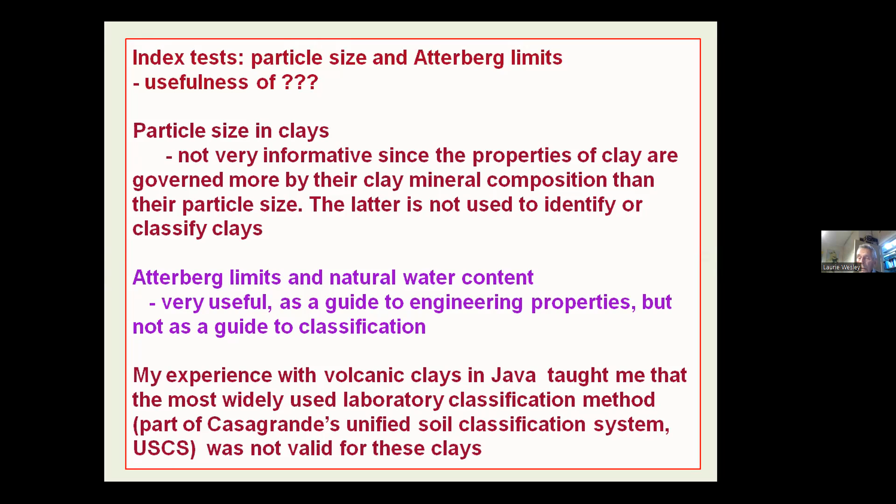But as a general rule, and I'll mention this again in a moment, you should never dry volcanic soils before you do your Atterberg limits and things like that, because it alters their properties. I just want to emphasize that Atterberg limit tests must be done properly, which means technical staff must be trained and supervised by people who really are experts in those tests.

When I was in Bandung the second time, we ran training courses for staff of laboratories that were being set up in the various provinces. Sometimes I did go to the province, and other times they came to Bandung, where I ran courses for them. And as I've said below there, me, a younger version, training engineers and technicians to do Atterberg. That would have been in Bandung somewhere. I came back in '68, so it would have been about 1970 where we were running those courses.

And it might surprise you, I've published quite a few papers with Atterberg limits, particularly the paper that Mike mentioned that I wrote not too long after I left Bandung, and there are a lot of Atterberg limits there, and in all of my other papers. None of those Atterberg limit tests were done by anyone but either myself or staff that I trained and supervised, just to make sure that they were reliable,

because some engineers are not very diligent in checking on the way their staff do these tests. And if you leave technicians to teach the test, they tend to drift away from proper procedures. So you just need to be aware, as I've emphasized there, it is necessary to do the test properly, but if they're done properly, they are very useful.

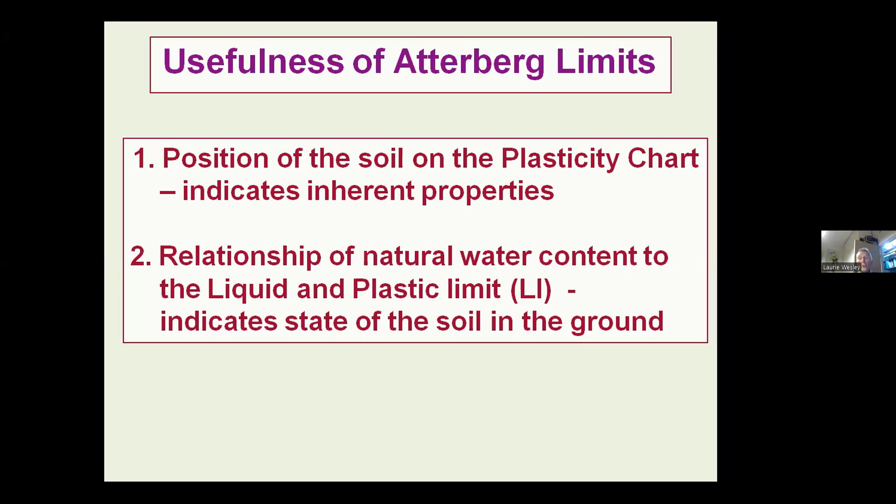And they're useful for two things. One is the position of the soil on the plasticity chart, which indicates just what the nature of the material is. What I've said here, it indicates their inherent properties. Then it's the relationship between the natural water contents to the liquid and the plastic limits. That tells you something about the state in which the soil exists in the ground. So let's have a look at that.

The plasticity chart was based on Casagrande getting hold of a whole range of various types of soils and working through them all and classifying them according to the manipulative test I've just described, and then drawing a line to separate the ones that behave like silts from those that behave like clays.

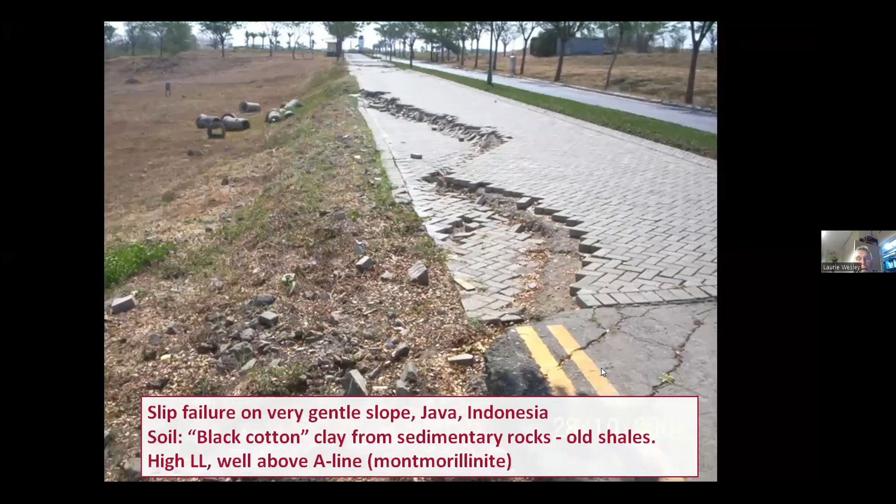Now, the second use of Atterberg limits, valuable about the state of the soil in the ground. To do this, we must also know, as I've already said, the natural water content. And I'm going to use the term compactness here, or denseness, although we don't normally use compactness or denseness for clays, but I'll just mention why. With sand, you use relative density as a measure of the denseness or compactness of the soil.

And with clay, we use this thing called the liquidity index, which is the ratio of the plastic limits to the... let's wait, and I'll bring the chart up in a moment. It's the ratio of the difference between the natural water content and the plastic limit and the liquid limit. That's what it is. It's the natural water content minus the plastic limit divided by the liquid limit minus the plastic limit.

However, with the clay, the liquidity index does not tell the full story. The liquidity index will actually only tell you what the remolded strength is if you remold it into a softened state. So we also need to know what the in situ undrained strength is to really evaluate the soil.

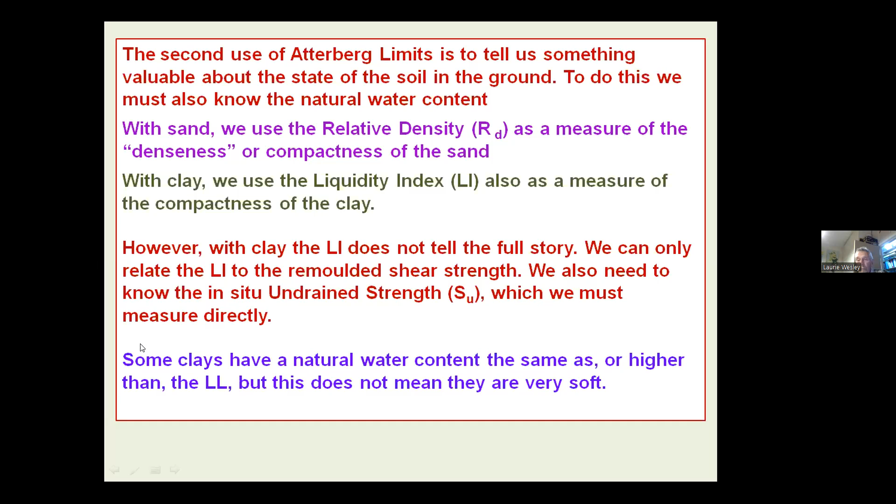Some clays have a natural water content well above the liquid limit, but that does not mean at all that they are soft. In fact, if they had a water content higher than the liquid limit and you thought that they were okay, once they were remolded, they'd flow away. In other words, if they had a water content higher than the liquid limit, they'd be flowing away. But there are plenty of soils with the natural water content above the liquid limit, quite firm in situ. This is just to emphasize that point.

There's plenty of literature to indicate that the undrained shear strength at the plastic limit is somewhere around 200. A recent paper said it should be about 170. And the difference between the undrained strength at the plastic limit and the liquid limit is a factor of 100. So if the undrained strength up here is 200, your undrained strength is 2 kPa and a little bit left.

So if your soil has got a liquidity index up here somewhere, it will be sufficiently liquid that it would just flow away. But as I said, there are quite a lot of soils that have got a liquidity index above 1, or natural water content above the liquid limit.

And tropical red clays, they generally have a natural water content fairly close to the plastic limit, so they would drop down here. This is some data we've got from weathered sandstone in Auckland. They're around about here. But the volcanic ash clays, they're mostly around here, but you can find the volcanic clays with a natural water content fairly well above the liquid limit.

Some of you may be aware of what they have in Norway, the quick clays of Norway, where they've got natural water contents well above the liquid limit. And they had a very famous slide there, I've forgotten the name of it. Mike probably knows it because there's a famous movie. This was way back in the 1960s, I think. They had a camera of it, how these big chunks of farmland were sliding down into the lake because they consisted of quick clays with water contents well above their liquid limit.

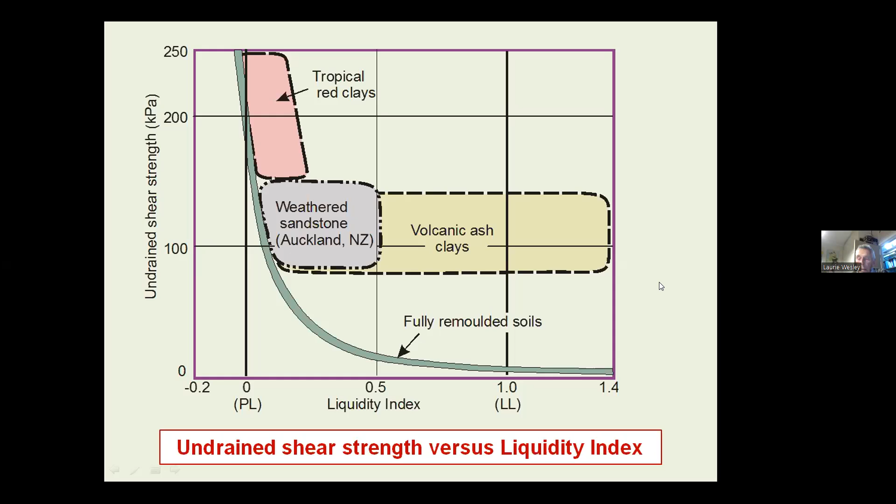That's a bit off what I'm trying to talk about. Let's move on to the next one.

We use a different index here to indicate the state of compactness of the clay, which, as I said before, is the natural water content subtracting the plastic limit over the difference between the two. So it's this amount here over that amount there. So it's telling you that if your natural water content is somewhere down here, it will not be a sensitive material. It will have a strength fairly close to the plastic limit strength. So it's not going to be a difficult material to work with if you want to do earthworks.

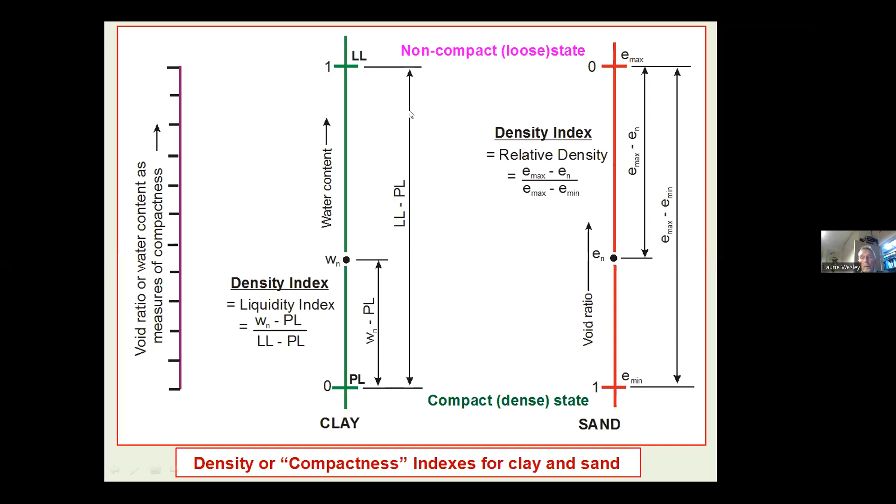In fact, the optimum water content from a standard Proctor compaction test for most clays is fairly close to the plastic limit. And so doing earthworks, you hardly need to do Proctor tests because the natural water content is so close to the ideal water content for compaction. But if you've got a natural water content way up at the liquid limit, you may well know from visual observation of the site that it's a perfectly safe material in situ. But if you want to do earthworks, it will be highly sensitive, and you'll have a lot of problems with your earthworks with clays with natural water contents higher than the liquid limit.

Moving on from this, clay with a low liquidity index is likely to be a strong material without a yield pressure. It will not be a difficult material to excavate and compact, and vice versa. Clays with a liquidity index near the liquid limit may be quite firm in the natural state, but may become very soft when disturbed or remolded. I won't spend time on the situation with the sand, but it's similar.

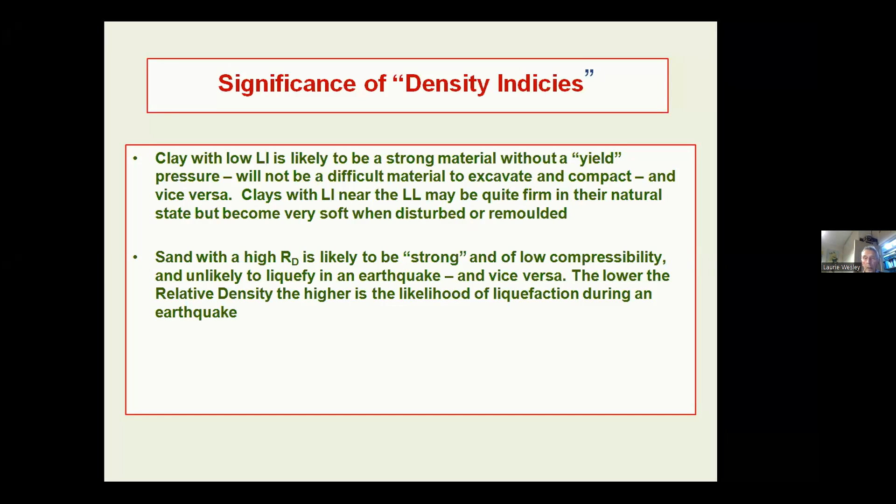Now, talking about these three types of materials in a general sense, the old sedimentary clays are generally of high plasticity and poor engineering properties. They're likely to be prone to swelling and shrinkage, and of low effective stress strength, so the C and the phi are likely to be low. Some of you may be aware of slips that occurred on the new toll road between Jakarta and Bandung as you head inland up towards Bandung. There were slips there. They were of volcanic materials sliding on top of the old sedimentary materials, and that's common with some of the very large landslides that you have in Java.

It's often the case that your volcanic material is not very deep, it's relatively shallow, and the boundary between that and the old shales is the weak point. The water is likely to be held up once it seeps down towards the old clays and build up the pore pressures above it, particularly during heavy rain. So the most difficult landslides in Java that I know of are generally of volcanic materials slipping on top of the old marine clays.

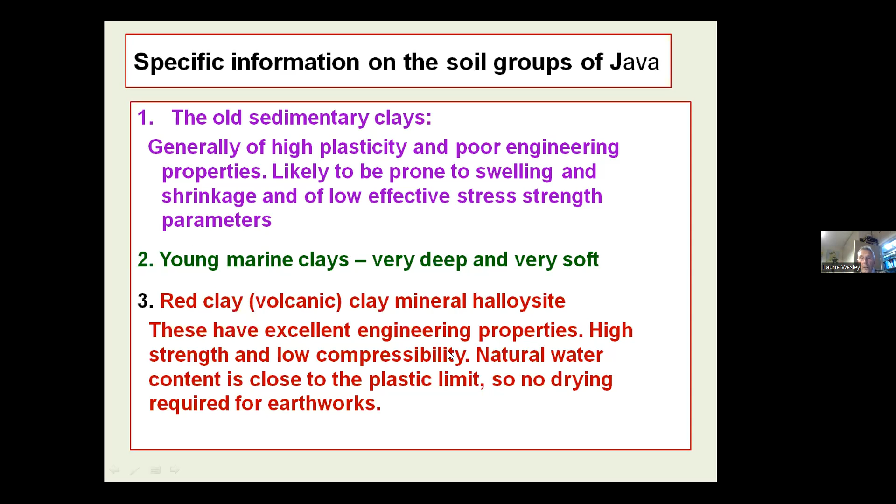The young marine clays I won't deal with. They're very deep, they're very soft, and they're not unique in any way from the young marine clays you've got in Malaysia or Thailand. Now the red volcanic clays, these are the halloysite ones. These I've mentioned have excellent engineering properties. For geotechnical engineers, they're like ideal materials. They've got high strength, low compressibility. They don't shrink and swell. Their natural water content is close to the plastic limit, so very little or no drying is required for earthworks.

That's a picture of Jakarta, where they're building a reinforced earth wall, and they're working in the red clays that you have around Java.

Thanks for that, Mike. I looked after it well.

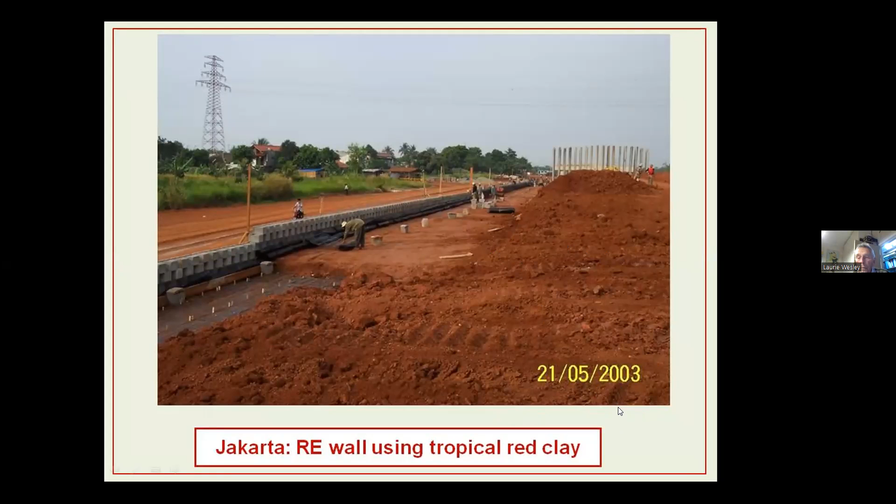The volcanic ash clays, these are unique, and their properties are they've got very high water contents and very high Atterberg limits. They've got water contents up to 150 or 200%, and they've got liquid limits up to nearly 200. When dried at room temperature or even in the oven, their properties change, and the change is irreversible. They lose their plasticity and they become like really fine sands or silt, and the change is irreversible.

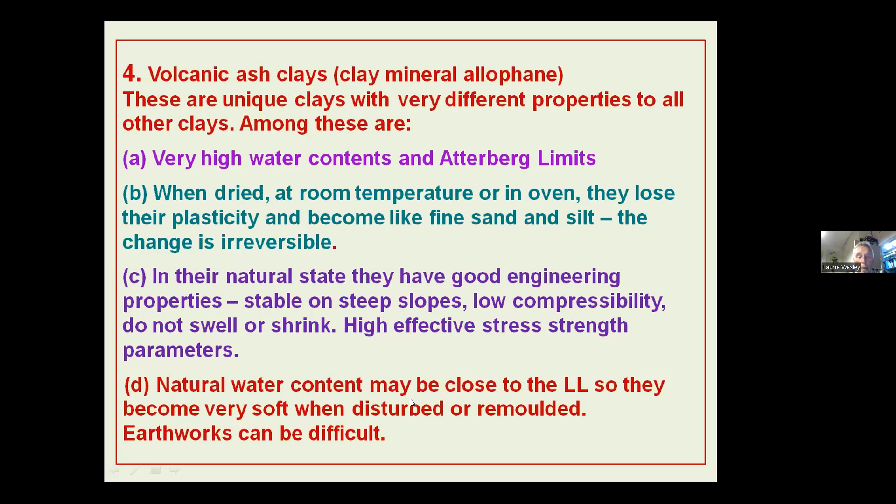In their natural state, they've got good engineering properties. They're very stable on steep slopes. They've got low compressibility and they don't swell or shrink. But their natural water content may be close to the liquid limit, so they become soft when disturbed and remolded. Earthworks can become difficult. Right, let's move on from there.

And this is an interesting dam. This is built out of this very unusual clay, although the Dutch didn't particularly realize how unusual it was when they built that dam, 1927 and 28. And the Dutch were a leading nation in soil mechanics, partly because of their involvement with building dikes and things like that. So they built this one out of volcanic ash clay with allophane and things like that, and it's performed perfectly to this day.

If you go back and look at the papers about this, you'll find that they were building another dam in a totally different location out of a sedimentary clay, and it was built to the same dimensions. Before they got the sedimentary one built to full height, they had a slip in it, and they gave up that project. But this one here got built to full height and is still in good shape today.

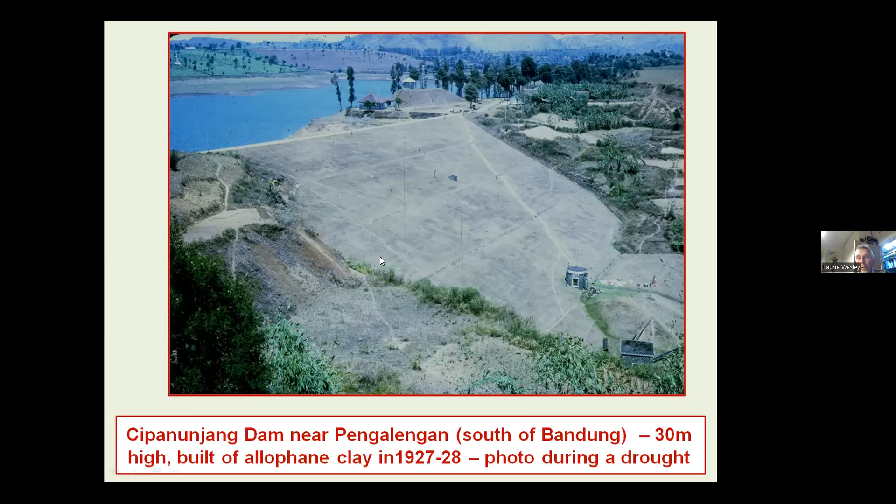Anyhow, this one I knew enough about these volcanic soils that I could recommend that they put this on a raft, and they put one on a raft. This is the second stage, and they were joining this one to the raft foundation here. There was a possibility that the load coming on here would cause some settlement. My estimate was going to be about 15 or 20 centimeters, which might have sort of caused a bit of

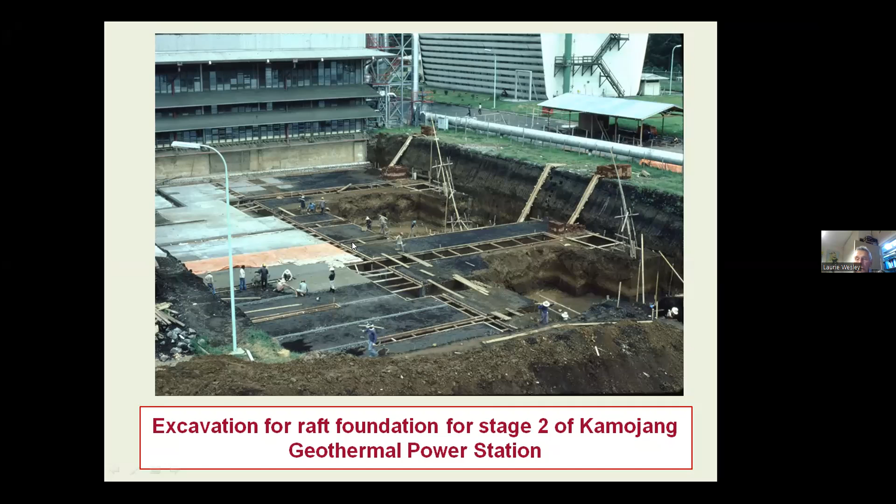distress here. But I was on the site some years later. I asked them if I could go down and have a look at the joint. They took me down and we had a very careful look. There was no trace of any distress. You couldn't see any cracks or anything going along here. So the settlement is obviously pretty small and not of any consequence.

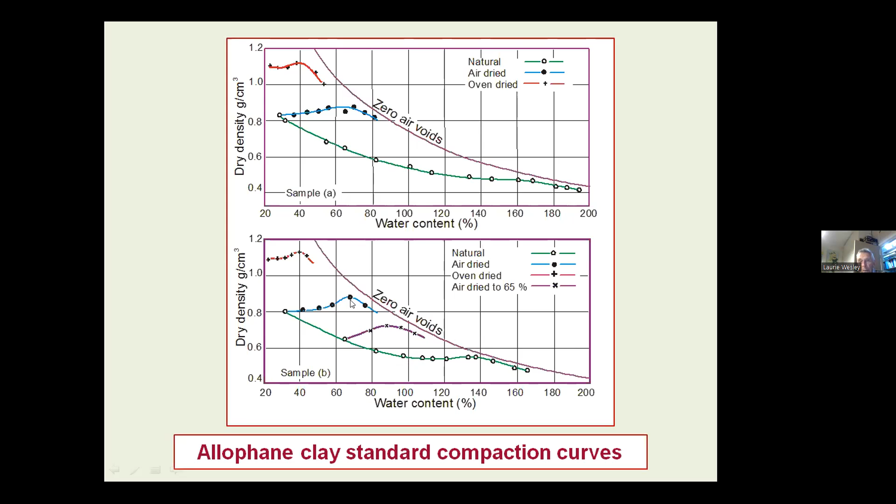So if you write your specification assuming this is your maximum, or up here, your maximum dry density and that water content, when the contractor comes to try and compact in the field, you won't be able to get to this point. You'll only be able to get to some point down there. So you just need to be aware of that.

And now, just for some general comments, the interpretation. How am I running for time? Yeah, I haven't got much longer. I think I started about 5:15. No, it's okay, Laurie, you're fine. It's good. Good. All right, am I? Yep.

The first one is oedometer test interpretation. If you are aware of textbooks or you paid attention during your lectures, you know there's a standard procedure that Casagrande dreamt up for identifying the pre-consolidation pressure. You draw a line out here, you draw a tangent out there, you draw an intercept here, and you project this back, and that intersection point there defines the pre-consolidation pressure. Now, I've got this from 3 textbooks.

If you then redraw these curves using a linear scale, you'll find there's no sign of any change in the gradient. So this interpretation here is not revealing anything about the soil property. It's just a feature of the way you've plotted the data. The log scale shows a pre-consolidation pressure, and the linear scale shows no signs of pre-consolidation pressure.

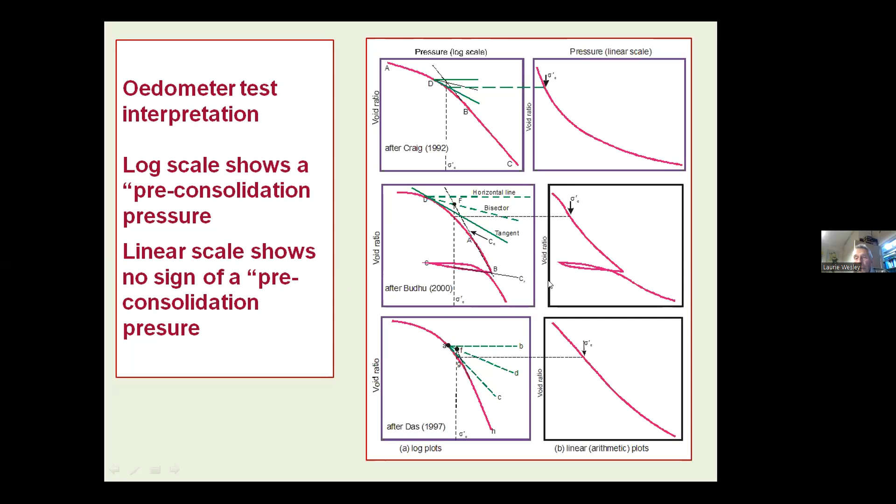And if I move on from there, I had some volcanic materials which were really quite different in their water contents, their void ratio. So I've done these 3 oedometer tests. One of the defects of the log scale is it suggests that the compressibility of all soils has got the same pattern. They come along and they curve over like that. You'll never find, if you plot it on a log scale, that you get anything other than this. So the assumption is you have a certain compressibility here and a different compressibility down here. But if you convert it to a linear scale, the picture is quite different.

Some volcanic soils and some residual soils definitely do have a change in strength or change in compressibility here. That should be called a yield pressure, not a pre-consolidation pressure. It's the point at which there's a certain structure in the soil that gives it a firmness that it holds onto up to a certain point, and then the pressure starts to collapse that structure and you get a yield going here. So this is called strain softening, really. Well, this is a linear one, and this is what they call strain hardening, because as the load comes on, the compressibility is becoming lower.

So that's a better picture, in my view, to give you an understanding of the compressibility of soils than the traditional one that you find in textbooks. The log scale rarely gives a useful picture of soil compressibility. And for settlement estimates, the linear parameter MV is much more appropriate than the log parameter CS. So you can get your linear parameter from this graph here.

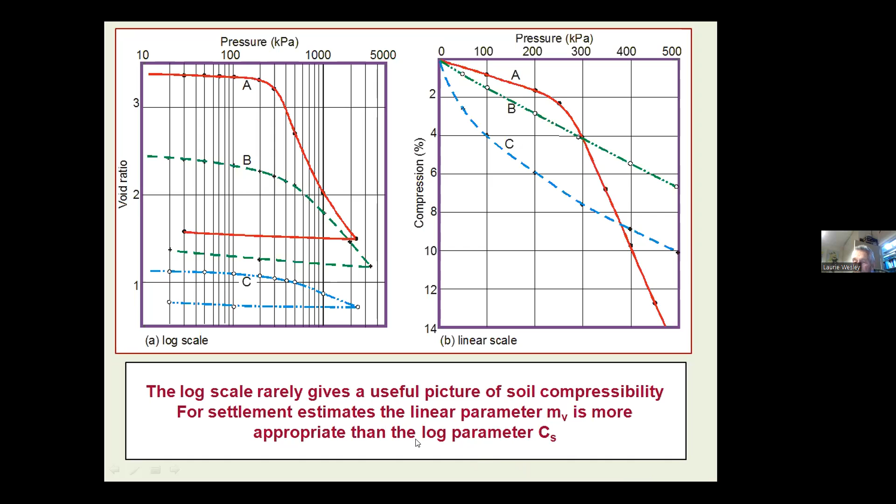Yeah, so that's what I've just said. I think that graph there is a far better portrayal to indicate the way soils behave than this one you'll find in a lot of the textbooks. The portrayal on the right gives a much more realistic portrayal for most soils.

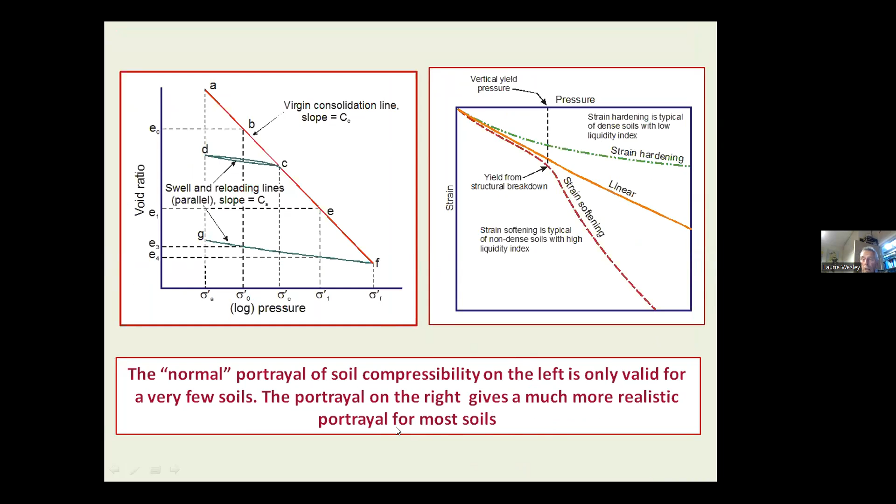And just a word about flow nets. This is not particularly important, although in some situations it is. If you determine by sticking down piezometers or things and identify a phreatic surface, the general thing that people do is they assume that this is a boundary between seepage and no seepage, and so they draw the flow net like this. That actually doesn't make much sense, because it implies that there's no rainfall on this slope here. There's only rainfall somewhere away from that.

So if you actually do it realistically, and you can do this, I mean, you can do it by hand actually, but I used SeepW to do it, and you put a uniform rainfall all along the surface here, and that will generate the flow net for you, and it will line in where the phreatic surface is.

So your phreatic surface is not a boundary below which you have seepage and above which you don't have seepage. In sands it would be different, because the water will drain out. But in clays, water doesn't drain out under gravity and leave voids behind. It simply flows down through it.

And it's not difficult to learn to draw these flow nets by hand. I sort of made myself really skilled at drawing flow nets, because I've always thought what a wonderful tool they were. But this is probably not particularly important with most slope stability work, because the assumption that there are no pore pressures above here is really a safe one.

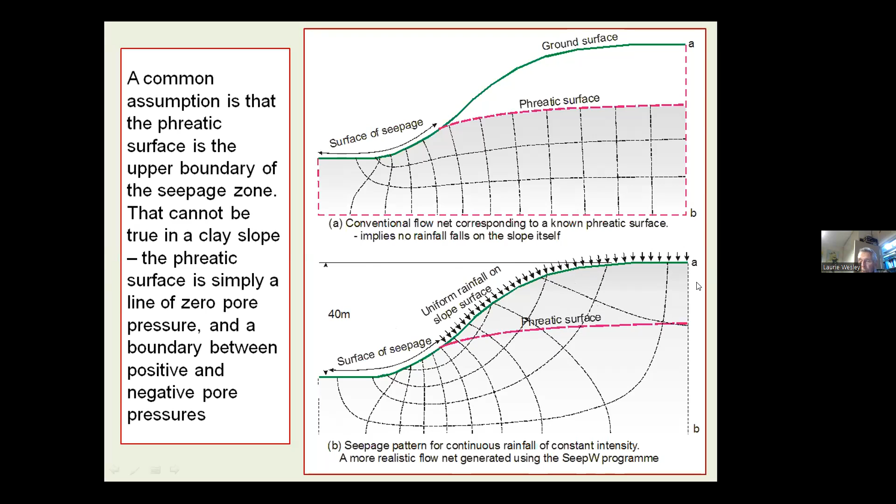And now a few notes about estimating slope stability with residual soils. I've already made the point about residual soils; these are mostly just a few pictures to indicate what you've got. I did quite a bit of work in short intervals in Malaysia once, and on a particular road they were having a lot of slips, and you can see how useless slip circle analysis or any sort of analysis would be with a soil like that.

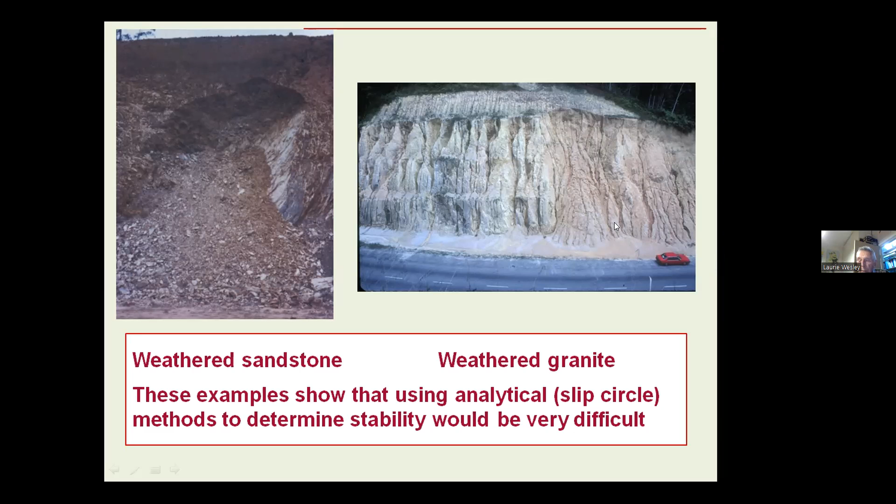Now this one's rather interesting. This is weathered granite, and we don't have weathered granites in Java, but they've got them in Malaysia. Their main feature is that they're highly erodible, although this is actually a surface slump here. But again, trying to apply slip circle analysis to this is not a particularly appropriate thing to do.

Yeah, this is, I can't move this down. I've got it, oops. Hang on, I'll come back here. Yeah, here we are.

Measuring the shear strength, C and phi, is very difficult. These are arguments about the usefulness or otherwise of analytical methods. Very few laboratories would have testing facilities large enough for the large samples needing to be tested. You'd have to have large samples of these non-uniform materials. And in addition to the strength parameters, knowledge of the seepage state in the slope would also be required if you want to do analysis of any sort.

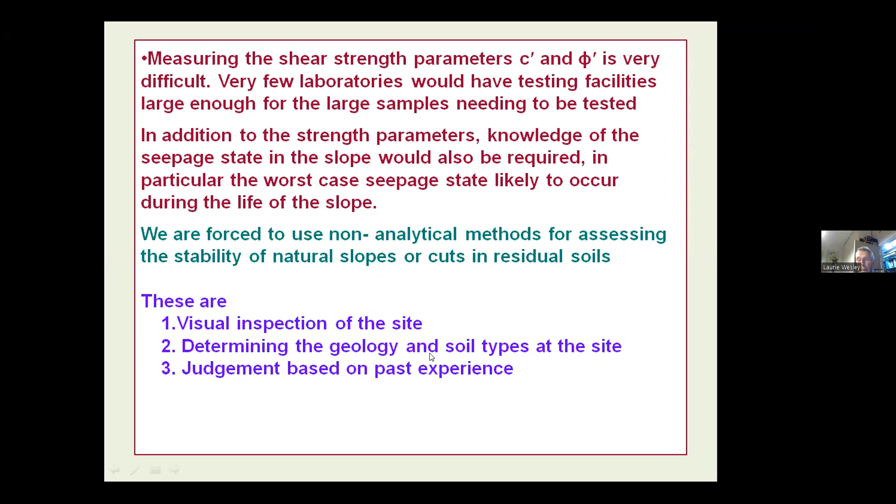In particular, the worst case seepage state likely to occur. That's what you need to know, and that's only a guess. You can make a guess at it and assume the very worst state, but it's probably likely to be extra conservative. So we're forced to use non-analytical methods for assessing the stability of natural slopes or cuts. These are visual inspection of the site, determining the geology and the soil types on the site, and then a lot of judgment based on past experience. Those are the sort of things that are important.

And this is the site that we looked at before. To build the dam, they had a borrow pit, and I think this is the slope of the borrow pit. This is the base of the borrow pit. But the back slope of the pit was perfectly stable. I'm not sure what was going on here. It looks as if they might have been stockpiling something here that slipped down. But the rear of it had side slopes about 30 meters high and an angle of 45 degrees. And I measured that up quite accurately just out of interest.

And then I was asked to advise a company wanting to possibly site a geothermal power plant, and they wanted to make a cut in, and they wanted to know how steep they could get away with for the back of the cutting. Well, I said I was pretty comfortable with 45 degrees, but I would like them to just make a couple of boreholes to satisfy themselves there was nothing unusual going on there. So just an example that if you can find a few actual slopes or cut slopes to have a good look at, they are very useful.

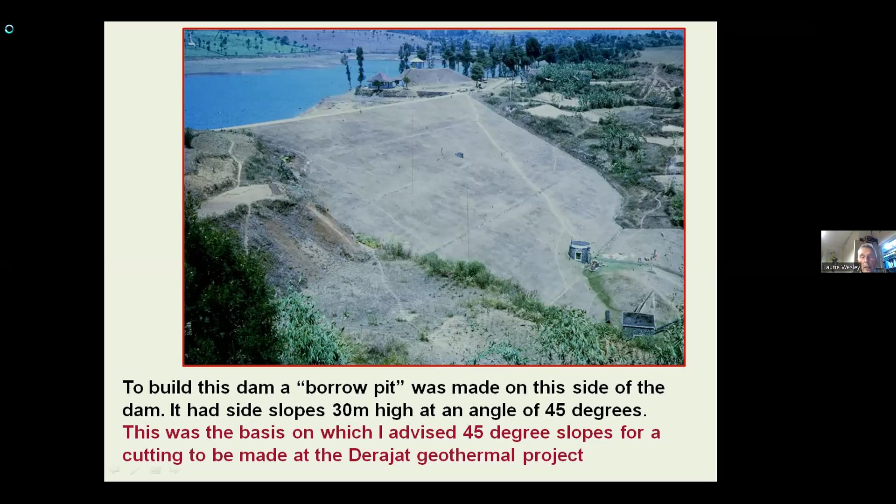If you've got a smooth surface like this, that generally means you're unlikely to have slipping. But if you've got a surface that's a bit rough like that, that's the indication that something's gone on there. Visual inspection is the starting point of assessing the stability of a natural slope.

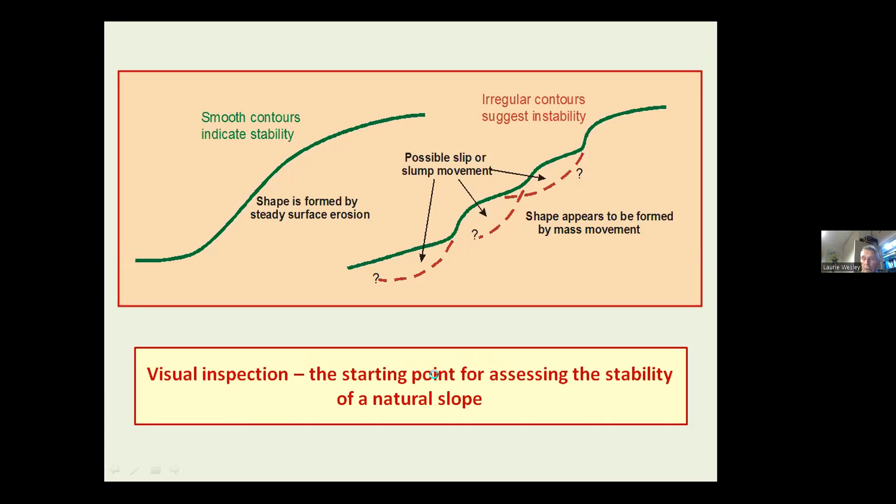This is a site near Auckland in New Zealand. It's very close to the CBD, but it's never been built on. You hardly need to be a geologist to know that this looks mighty like an old slip. This is the scarp of it up here. That's the edge of it, and it still moves a little bit. I'm just pointing out it's very valuable land, and the developers would dearly like to have it, but the geologists clearly ruled it out in the early days of the city's development, and visual inspection clearly shows signs of instability.

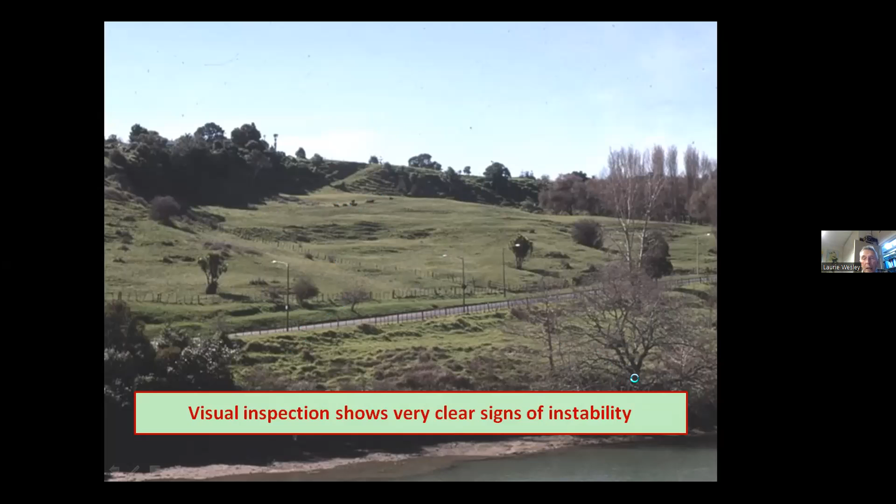And this is a slip, which is a sort of a lesson. This is a road going up to, not to Kamojang, up to the Darajat.

This was before they were starting the power station. They were just getting underway. And so they cut that cutting there, and it slipped. And I took the picture from this side. Then I went to the other side and took another picture looking back the other way.

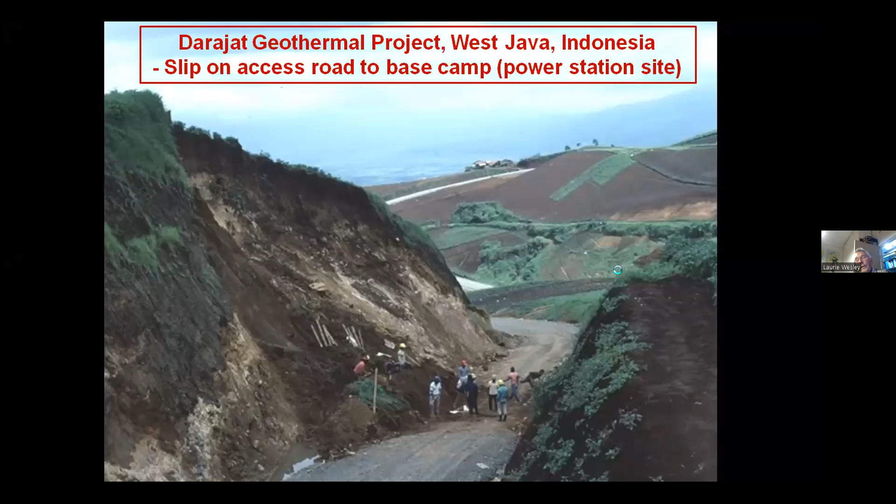And you can see here we've got nice tidy layers of allophane clay. But down below it, we've got this very different material and very mixed. But this appears to be what you would call hydrothermally altered material. You get these flows of hot water carrying various types of chemistry through it, and so that's altered that. So this is the reason they've got instability there. If this had been all the way down, then they would have no troubles.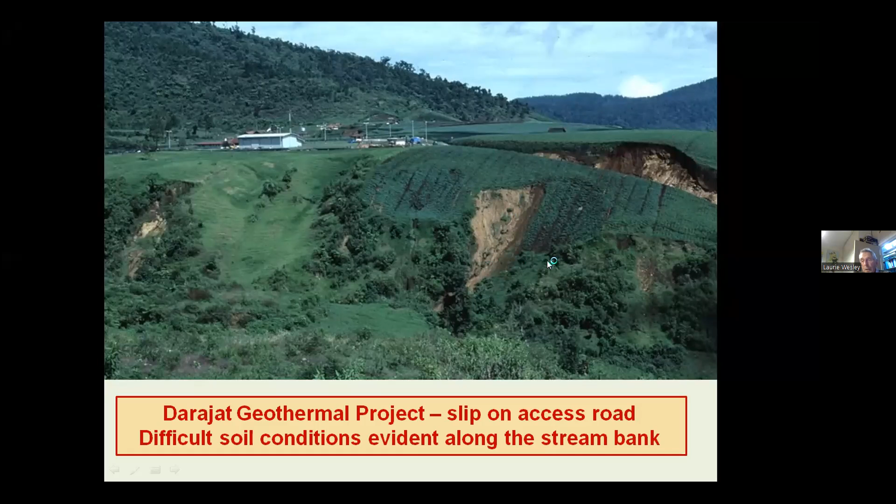So if somebody had expected this, they might have said, well, let's avoid this and take the road further along the side and follow the contours, so that they wouldn't have had to make those excavations.

So this just about draws me to the end of what I want to say, but I'll just mention something I came across when I was involved with Malaysia some time ago: a geologist did a very careful survey of all the road cuttings at the time. He published this paper back in 1968, in the proceedings of the first Southeast Asian conference. And what he did was he went around with a surveyor. Well, they maybe just had an Abney level to work out the slopes, but he took measurements of the height

of the slopes and the geology, and then he produced a paper with tables recommending slopes for the various heights and the various geological formations. And it's a very useful paper. And I think that paper is still the best guide for determining cut slope angles in Peninsular Malaysia. But now there are a great many more cuttings, many of much greater heights. And in my view, it's surely time somebody did a similar survey.

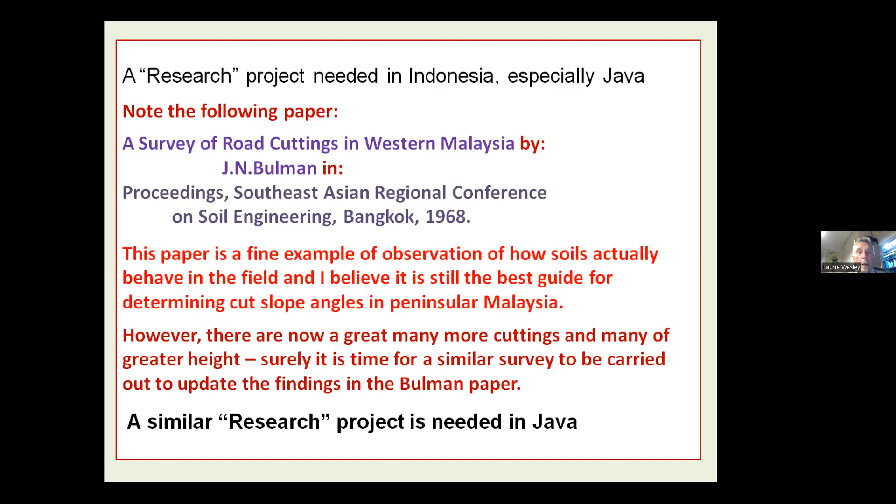And I think somebody should be doing it in Java, because with the advent of all these new toll roads they are building, there are lots of slopes all around in various materials, and putting together a paper summarizing the heights, the angles, and the geology would be very useful for people building more roads requiring cuttings.

Just a comment, how to become a better geotechnical engineer. Recognize that geotechnical engineers are not like structural engineers. The latter have control over the properties of the materials they use: steel, concrete, wood, etc. Geotechnical engineers deal with material that is never uniform, so that theoretical analysis is always an approximation. In many cases, it may be a good approximation. In other cases, it will be a very poor one. Geotechnical engineers must always judge the reliability of the information they are using in their theoretical analysis.